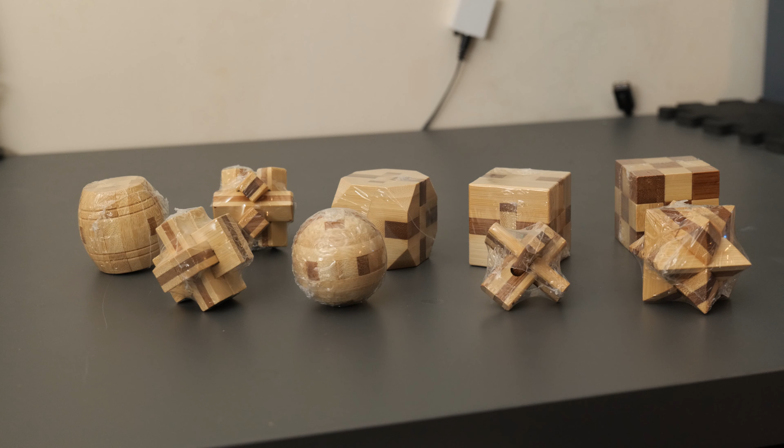When I was younger, my parents bought me and my siblings a set of 3D wooden puzzles exactly like this. They're basically like 3D jigsaw puzzles, and the goal is to take them apart and put them back together. It sounds simple enough, but these things are really difficult.

Recently I've been trying to improve my 3D modelling skills, and when I took these out of the box and had a look at them, I had a light bulb moment. What if I could recreate these using 3D printing, so that if I ever want to give them to someone, rather than buying the wooden ones again, I can just print one out and hand it over to them. So in this video, that's exactly what we're going to be doing.

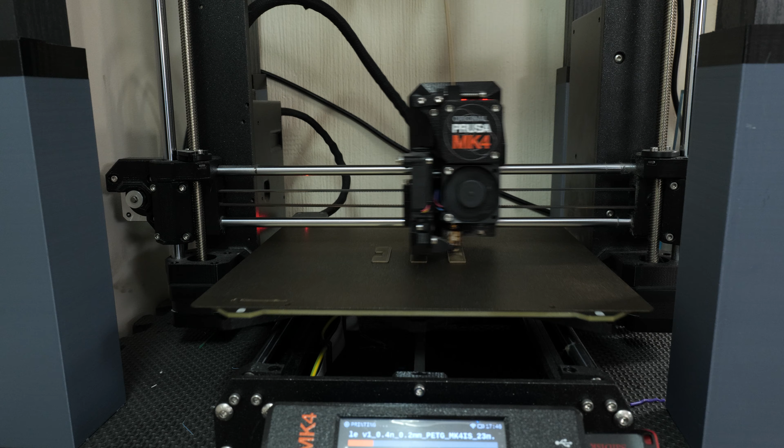I'm going to share with you guys how I took a few of these puzzles, modelled them in Fusion 360, and then 3D printed them. I've broken down the modelling process into small details, so if anybody wants to follow along and make these themselves, hopefully they can. With all that out of the way, let's jump straight into it.

The first step was to disassemble the puzzle into its individual parts, and that was actually harder than it looks.

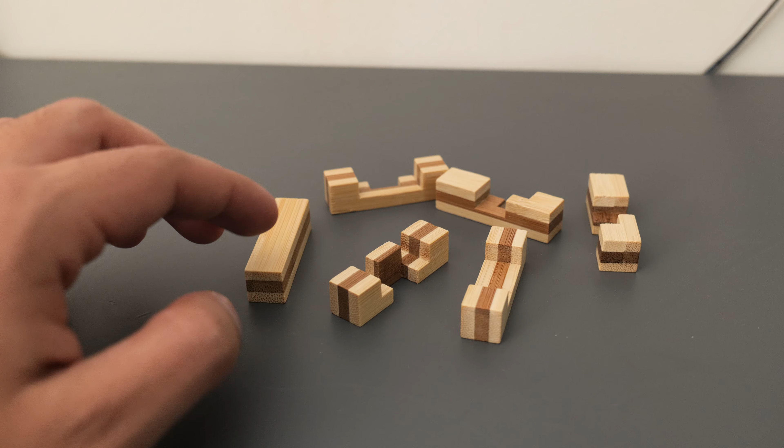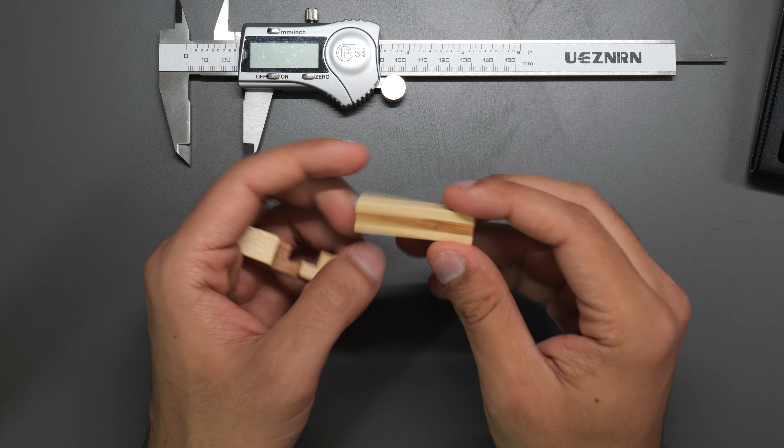Alright guys, so before we jump into the modelling process, let's take a minute to look at the overall geometries of these pieces. I've got two different pieces here, and off the bat you can see they're very similar in shape and size. Essentially they're all the same piece to start off with, and then afterwards they have unique cutouts and extrusions into them.

So this is piece F, and you can see it's just a simple rectangular extrusion. This is another piece, almost identical to F to start with, and then it's got this uniquely shaped cutout which helps it fit into the overall puzzle.

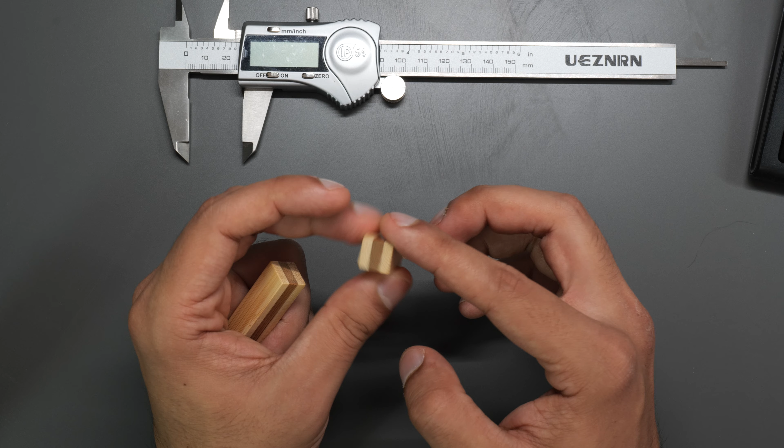So the way we're going to do this is we're going to start with F first, make copies as we go, and then using the calipers take the measurements needed to cut out these extrusions, and then we'll go from there. I've also noted that these pieces have a very slight fillet along the corners and edges, so we're going to have to build that in as well. It's very faint, but it means the printing will be a bit easier, but also fitting the pieces together. So that's the plan.

We're going to load up Fusion 360. I'm going to model the first two pieces on camera, and then we'll do a little speed run through to the end, and then we can go from there.

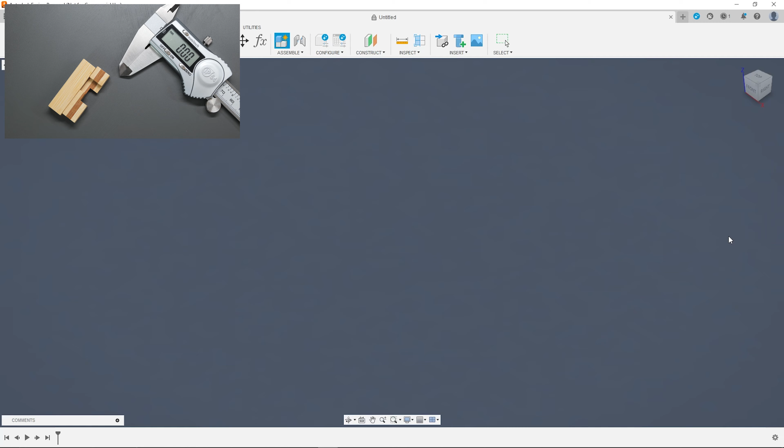Right guys, here we are in Fusion, and to start off with we're going to create a new component, and we're just going to simply call this piece F. And start a sketch. We're going to start off with the main shape, which is a square slash rectangle, and then we'll go ahead and extrude that in a moment.

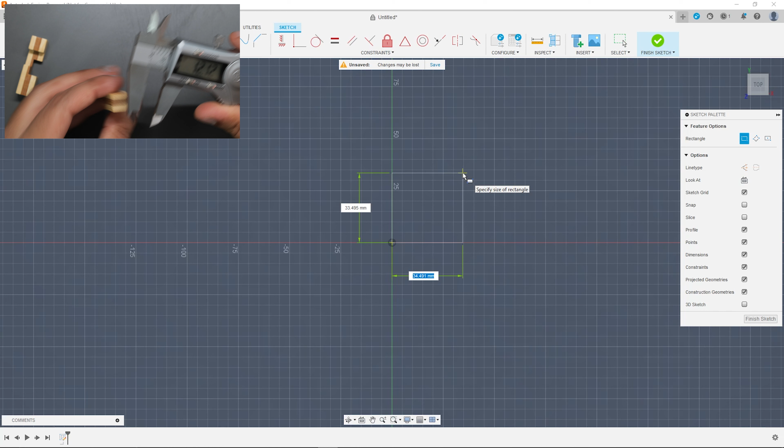So let's get our calipers, make sure everything is zeroed out properly. That's good. Let's measure the overall shape first, see what we were working with here. So 11.98 by 12.12, so that's our overall shape to start with. 11.98, 12.12, great. Now what we're going to do is hit E for extrude, and we're going to see how long this overall piece is, and use our calipers again.

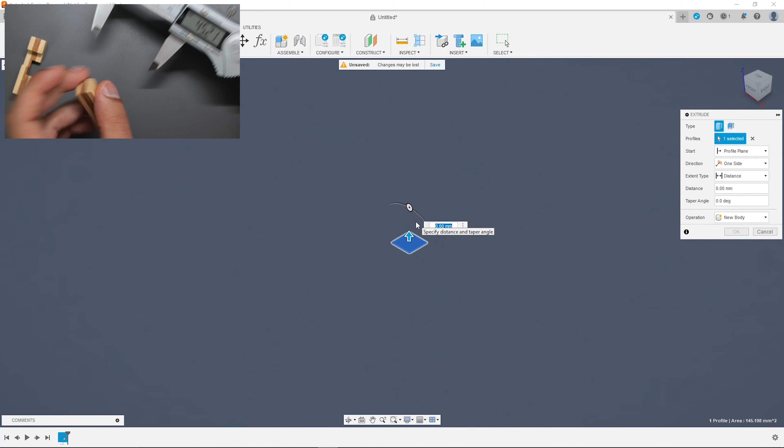45.18 millimeters, so 45.18. So that's basically piece F done.

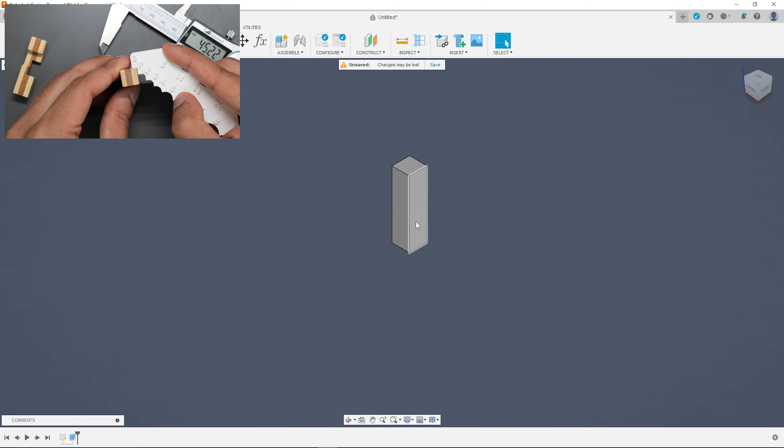This is a little fillet guide that I printed from Printables, I'll leave a link in the description. It is so handy. So let's see what size fillet we're going to add to this. This is a size 1, so you guys can see, and just about make out even the size 1 is too big. So I'm going to eyeball it and say the fillet we're going to add is 0.5. We select all the edges, press F for fillet, then 0.5, and just like that, that is piece F done.

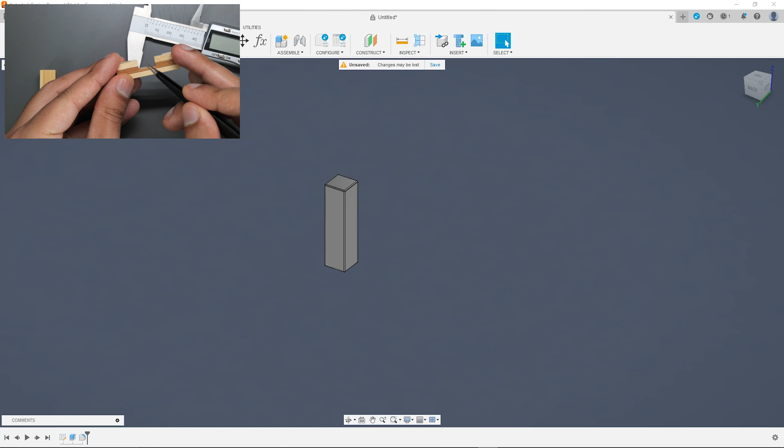So now that we've got the first piece modelled, we can use that almost as a little template and go ahead with the others. If you look at this piece, it's basically a duplicate of piece F, but it's got two cutouts. You've got one cutout here, and then if you flip it, you've got another one there. So I'm going to go ahead in Fusion and duplicate piece F, and then see if I can get away with just two simple extrusions using the cut function. Let's see how that goes.

Over in Fusion we're going to go ahead and say copy, and then paste new, and we're just going to rename this. I can't remember what this piece was called, but for now we'll just stick with F. Rename - I think this was piece B. I could be wrong, but it doesn't matter too much anyway. So let's get rid of piece F now. I'm going to go back to before the fillets were done, only because it makes it a little bit easier.

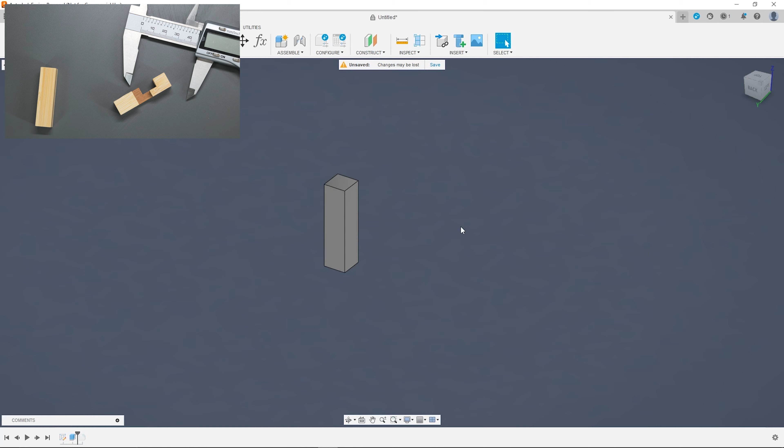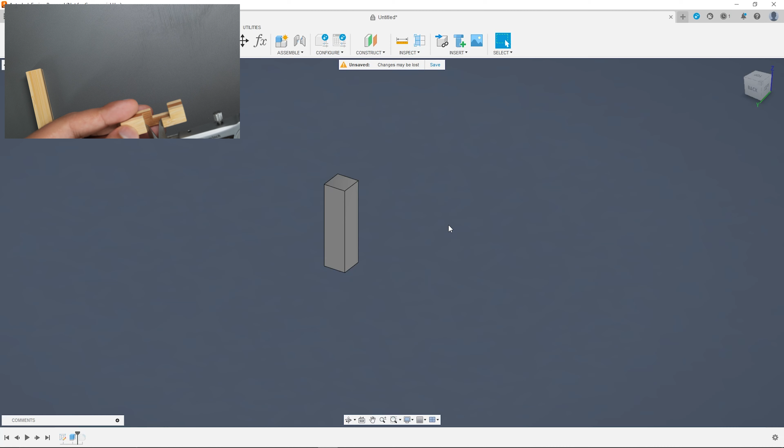Let's have a look at our calipers and then take some measurements. So if we're looking at it from this view, the first cut starts at about 16.3 mil and is, sorry, 16.3, and it's 12.10 mil wide.

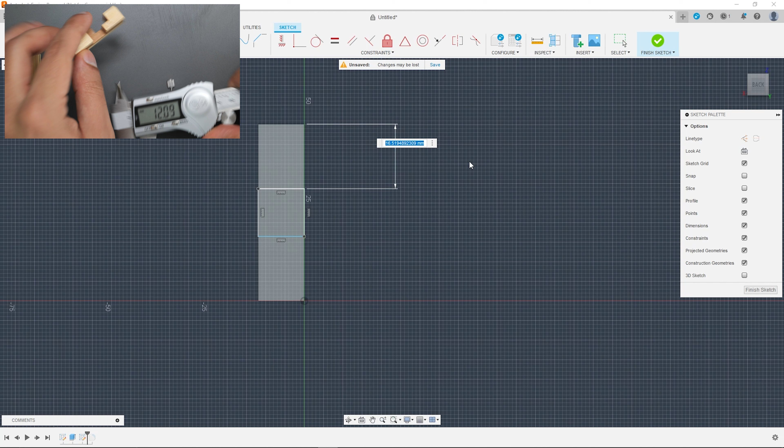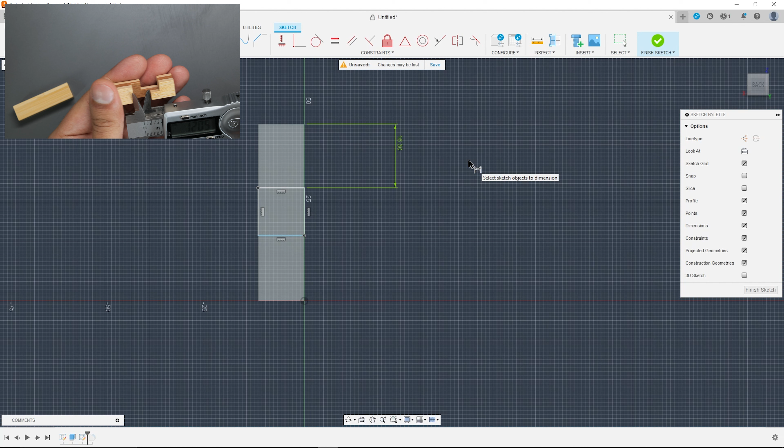So let's go ahead and do a sketch on any of the surfaces. Let's just do it there. We're looking for a rectangle there, and we're going to use some distances. Let's check that again. From the top it was 16.3, and the cutout itself was 12.10.

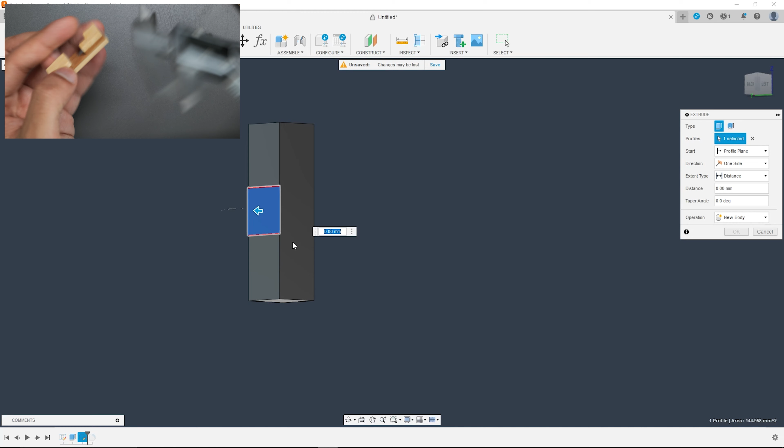Now we're going to use the extrude function. We're going to measure how deep the cut goes. Using the calipers in reverse, we can use this little ruler function. It goes in by 6.75 millimeters, so minus 6.75. Lovely, that's our first cut done.

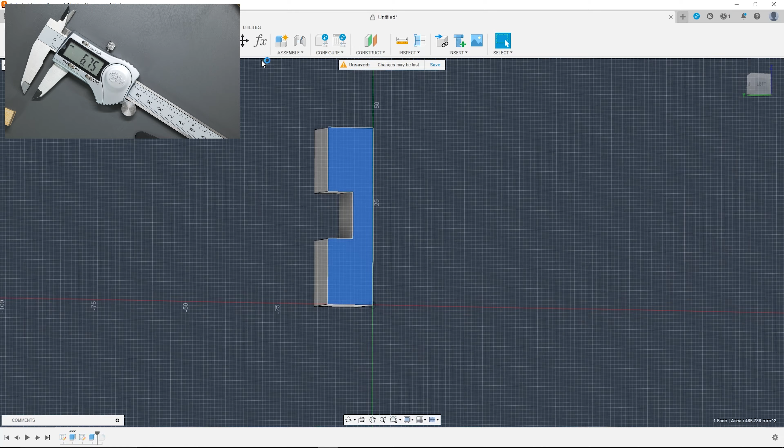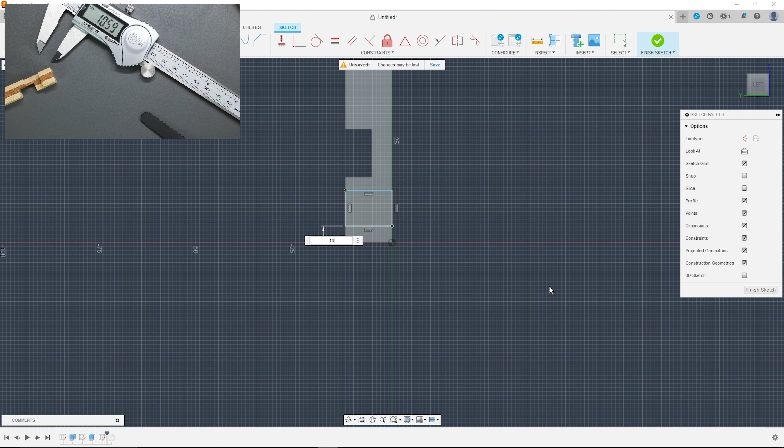Now we're going to do something similar on this surface here. Another sketch, flip this way, and our second cutout from the bottom edge starts at 10.59. We'll do another rectangle like that, distance 10.59. And the cutout itself is 12.08. Now we're going to extrude both these faces.

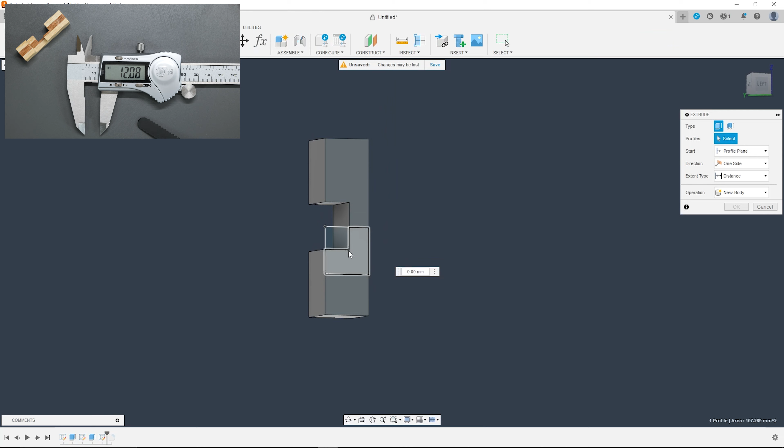How deep does this one go? We use our calipers again. 6.55, so minus 6.55.

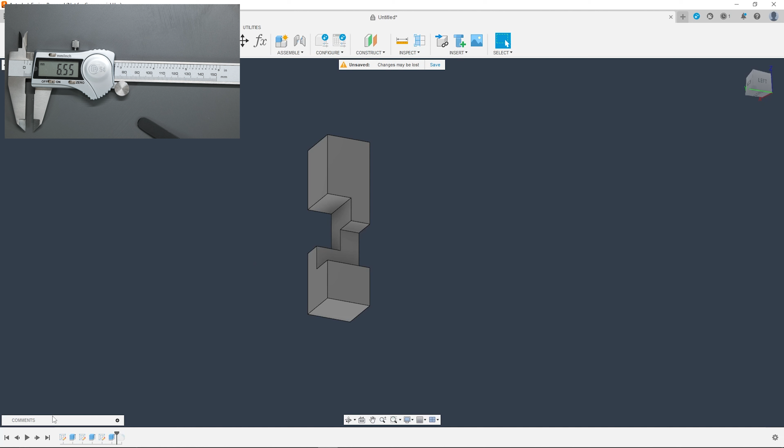And there we have it, guys. Now we're going to go ahead and add all of our fillets back, so we hit forward. I'm actually going to remove that fillet command because it doesn't include all the new faces and edges we've created, so I'm just going to go ahead and do that again.

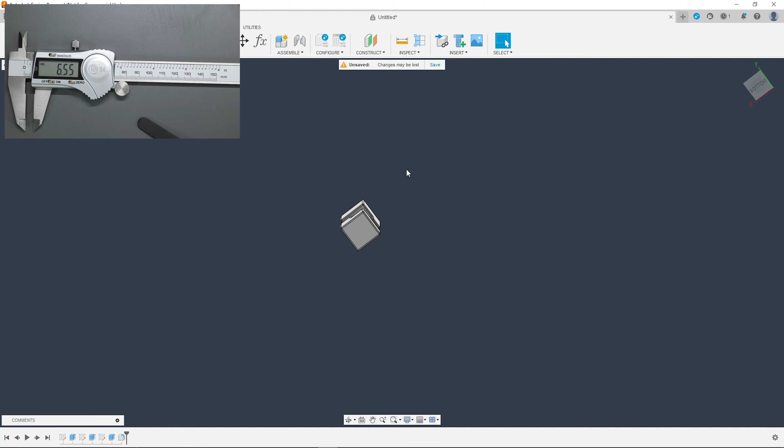If I just rotate this over a little bit, it looks identical to this piece over here. Have a look, just comparing the two. Perfect.

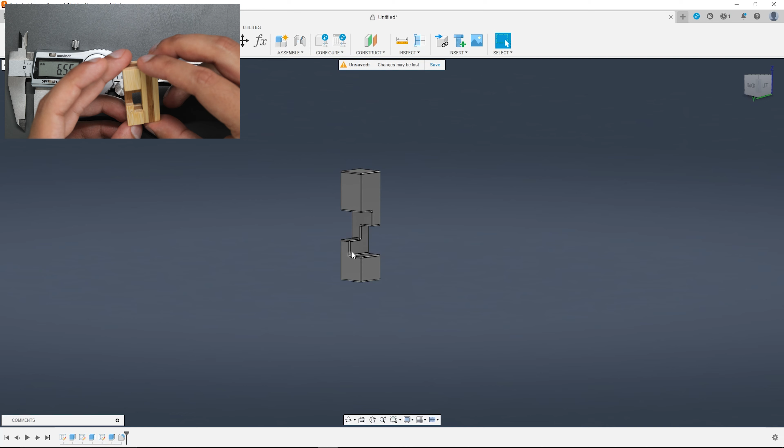So that's how we did the first two pieces. I'm going to go ahead now and on camera model the rest, but I'll speed this bit up, and if you want to follow along you can slow things down. In the future, if you guys want me to avoid speeding up videos, especially for these modeling parts, please let me know, I'm happy to take that feedback on board. Otherwise, let's go ahead and model the rest of the pieces.

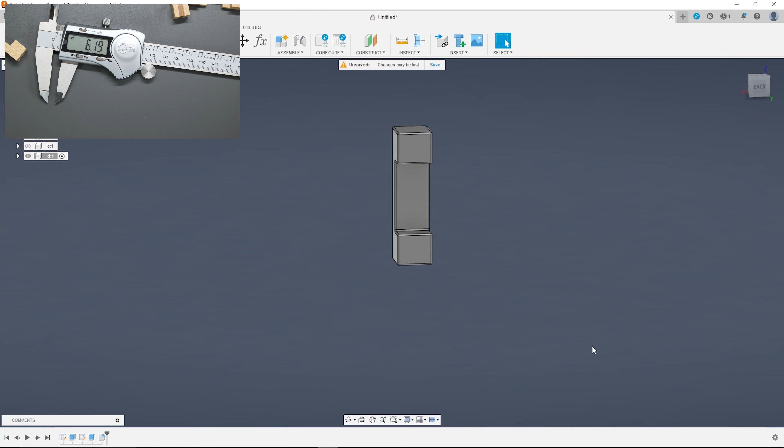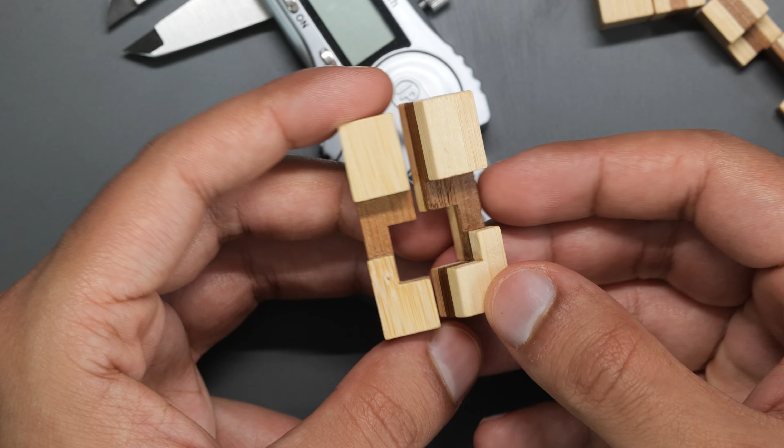As I was getting to the last piece, I've made an important discovery. These two pieces, I think B and C, this was the second one we modeled, and this was the last one left. If I put them side by side, these are basically mirror images of each other. So rather than modeling this again from using F as a base point, I'm simply going to mirror this one along this axis.

It'll be a bit easier if I show you in Fusion. I'll mirror this one and save it as a new component, and then we should have a copy of this piece here, saving a bit of time. So let's head over into Fusion and do that, and hopefully it works.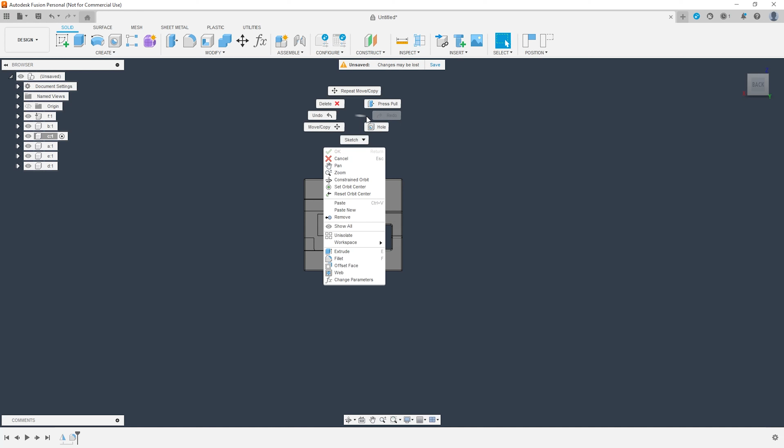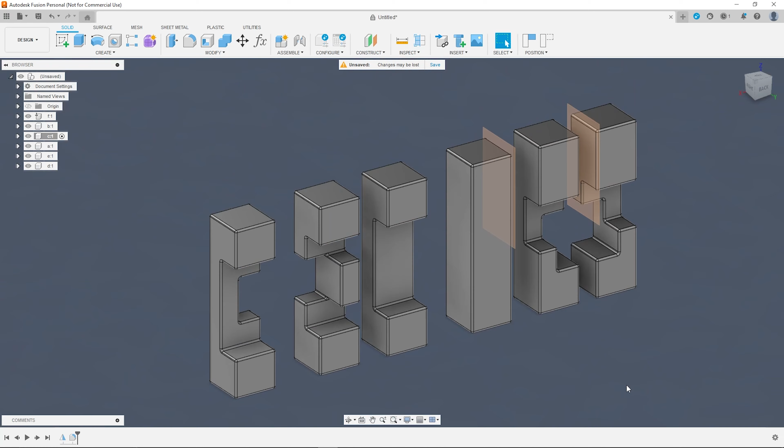And here we are guys, all 6 pieces finished and modelled. If we zoom in, we've added some nice fillets, and my hope is that when it comes to assembly, the fillets will help the pieces fit together. I have a feeling we're going to have to add some offsets in these fit together areas, the fitting surfaces if you like, but I'm going to go ahead and get these printed off now.

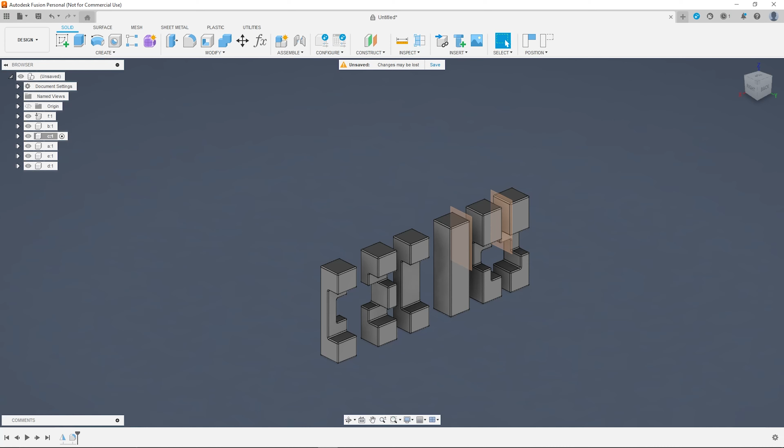We're going to pick some nice colours for the pieces. There's 6 pieces, I'm going to pick 2 different colours so we can have a 3 and 3 split, just adds a little bit of a nice aesthetic, and hopefully we can get this fit together. So let's go ahead and pick some nice filaments.

Right guys, so here we are over by the 3D printers. In my Mark IV, I've loaded up this nice copper PETG, so we'll do half the pieces in that. On my 3.9 we've got some standard black PETG. I think copper and black make a nice contrasting set. Let's go ahead and get everything sliced up, and then we can send it over to the printers.

I brought the parts over into Prusa Slicer and got them ready for printing. I sent half of the pieces to one of my printers and the other half to another.

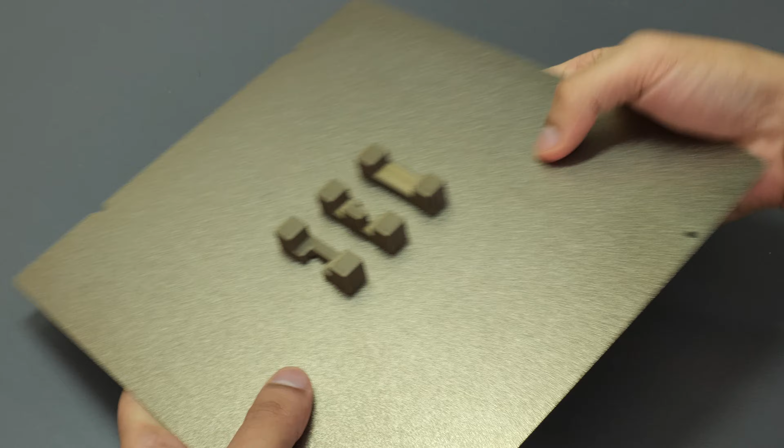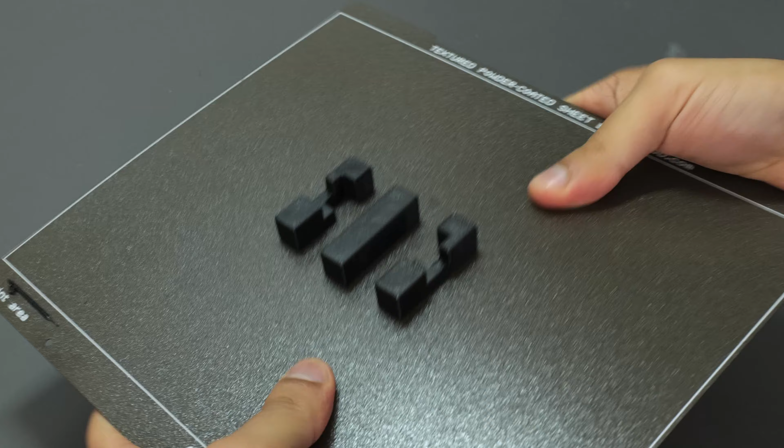Once the parts had finished printing and I'd taken them off the build plates, it was time to have a go at putting it all together.

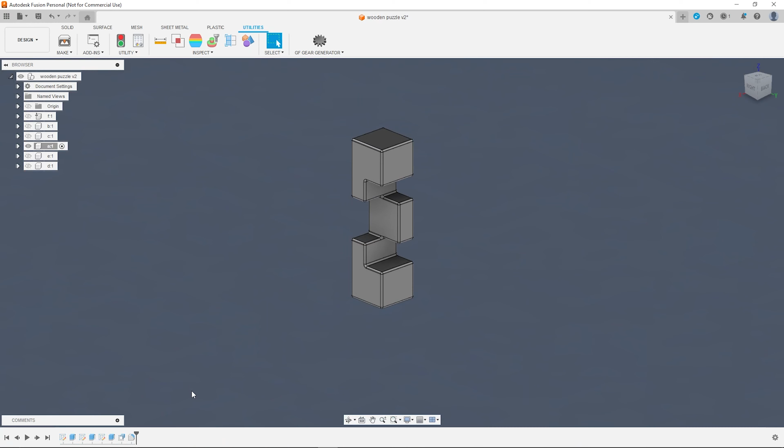Right guys, so we've run into a bit of a situation with this, and as I suspected, the tolerances have caught us out. This black piece is meant to fit into this insert within the copper piece, and I've tried forcing it in and seeing if I can ease things up a little bit, but this is just way too tight. Rather than hacking it away with the deburring tool or something, I think I'm just going to go ahead and get this printed. So I'm going to hop over back into Fusion 360, increase the tolerance here a little bit, and then hopefully this should work. Let's have another go in a few minutes.

With the modified part in hand, it was time to have a second go, and I was feeling cautiously optimistic.

And this was the final assembled puzzle, and I'm really happy with the way it turned out. The 3D printed puzzle is really similar to the wooden one. It comes apart and fits together exactly the same, and with 3D printing I'm able to use different colours, and I think this combination looks really nice.

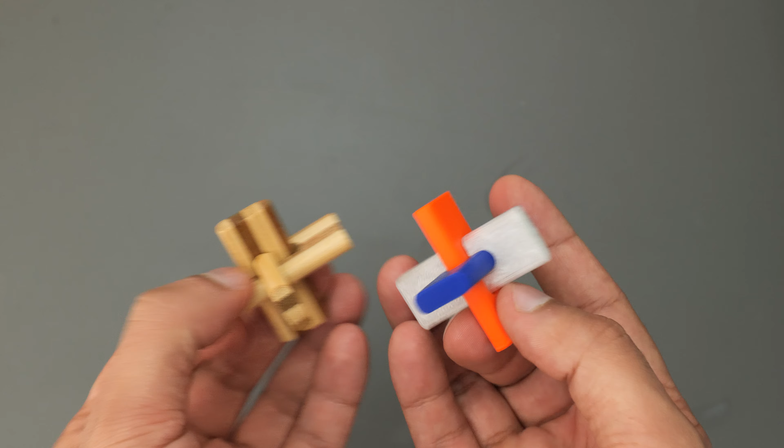So following the exact same process, I was able to replicate a couple of the other puzzles using 3D printing, and I think these turned out looking amazing as well.